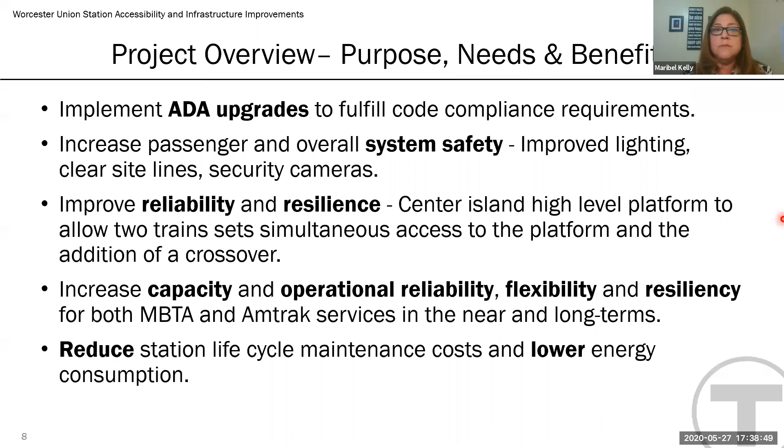So with the next slide, please. With that said, I'm going to give the post to Chris. He is our architect for Union Station, and he can give us detail of the project overview.

Thank you very much. Thank you, Maribel. With this first slide, this is a project area map, just to help identify the location of our project in relationship to the greater Worcester area. Our project is located adjacent to Union Station, which is item number 1 on the plan, with our platform, which is item 2, extending from Union Station towards the east to the existing MBTA parking lot, which is item number 3. Union Station, as many of you know, is located in downtown Worcester and within walking distance of some of the popular areas, such as area number 5 to the south, which is the Canal District, and the new Polar Park area number 6, also to the south and west of the station, as well as City Hall, which is area number 7, and the DCU Center, area number 9.

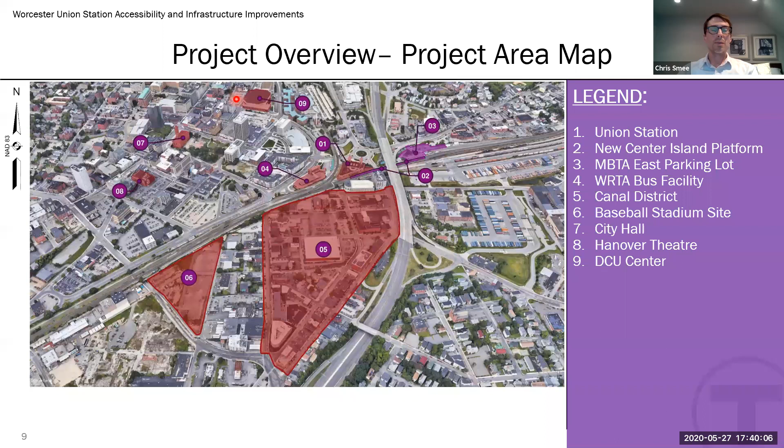Next slide, please. This is an existing conditions layout, really just to emphasize the fact that the existing platform is only a partial high-level platform, so the only accessible boarding area is directly behind Union Station. Then as the platform extends to the east under I-290, it transitions into a low-level platform, and all of that is adjacent to the existing station track. So it's only a side-mounted platform, a side platform, so it only allows for one train to enter the station at a time.

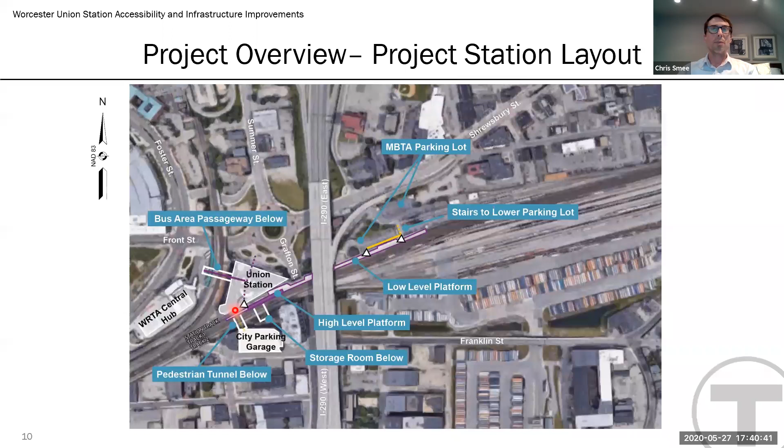Here we're going to talk about station access. The station platform is going to be a new center island platform, item number 8 on the map, which extends east to west under I-290, with access to the platform at the west side coming through the station building, and on the east side coming from the parking lot.

The station building does offer multimodal access, whether that's area number 1, the passenger drop-off area in front of the station building, or area 2 to the south, the existing parking garage, which provides access via an underground tunnel.

From Harding Street, area number 3 is where the taxi stand and designated Lyft and Uber pickup areas are. Area 4 is the existing WRTA, the Worcester Regional Transit Authority bus facility for local buses. Area 5 along Harding Street is for intercity bus connections.

On the west end, all of those intermodal transportation areas will come into the building at area number 6, the existing rotunda. Our project is going to make a new connection, item number 7, a new passenger platform access corridor. This is also where we're going to relocate ticketing to.

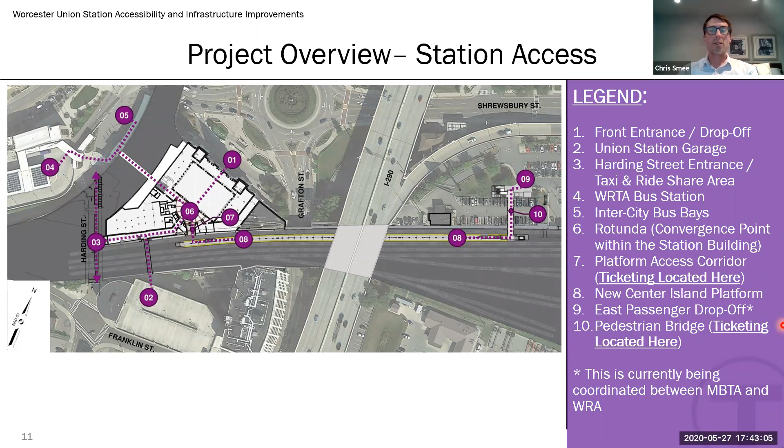This is an overall 3D view of the station. I really just want to emphasize here that this is a full-length, high-level platform located between the station track and track 1, so we'll have access to trains on both sides, allowing for two trains to enter.

This platform will have a full-length canopy, providing coverage for passengers along its full length. Access at the east and west sides we'll get to in a moment. Some existing features are identified in black, and the new proposed features are identified in purple.

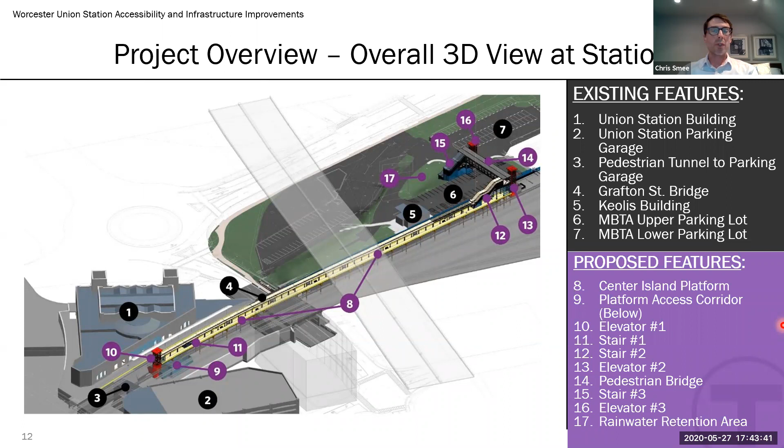This is a 3D view of the west end of the platform. Primary focuses here are the access from the new passenger platform access corridor, area number 3, shown in light blue, with access up to the platform via the stairs, item number 4, as well as the elevator, shown in red, item number 1.

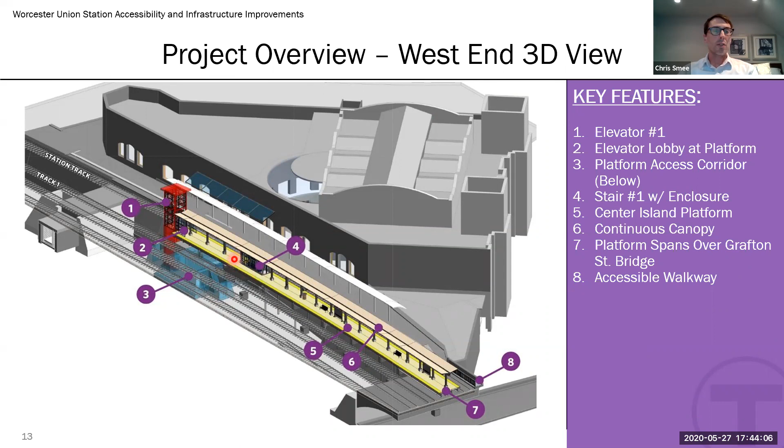This is a rendering of the proposed platform from the existing parking garage roof. One thing to note is that this rendering, as well as the rest of them, are not finished renderings. You can see we're showing the Union Station building just as a simple mass, solid gray, solid white. It's really just to give you an idea of the overall feel of the station. Finishes and things of that nature aren't what the final ones will be.

Most of those will typically be painted black steel, reminiscent of historic train stations, to help tie the new platform in with the historic station itself. Another thing to note is I-290, seen in the background crossing over the platform, which creates a visual separation between the east and west sides of the station for most views.

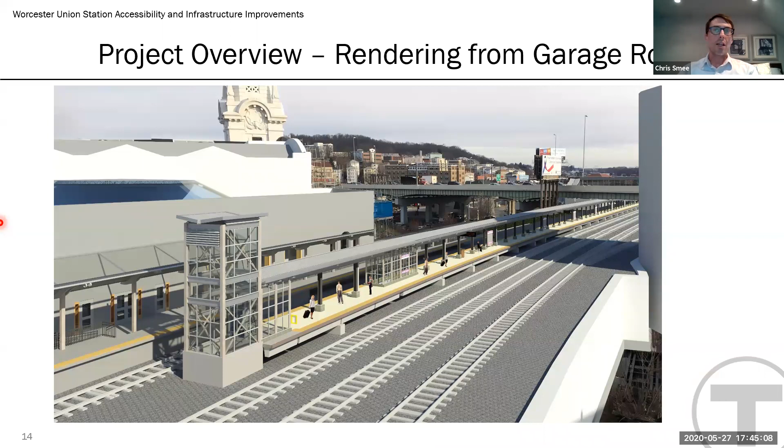This is a rendering from the platform, the west end of the platform looking west, with the new stairs going down directly in front of you, which will be protected via an enclosure, and the elevator in the background.

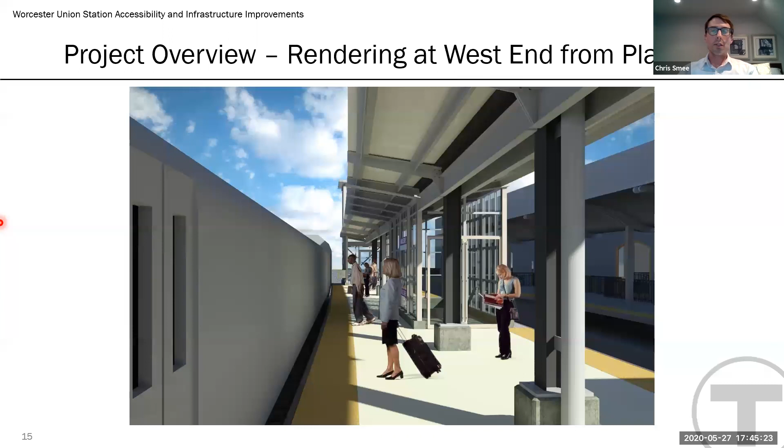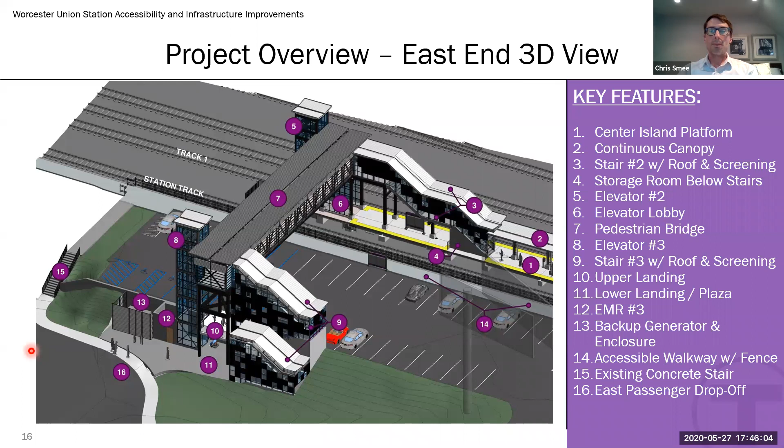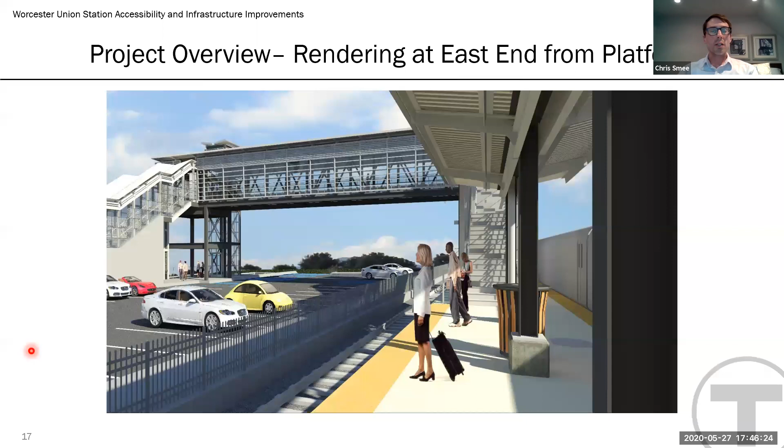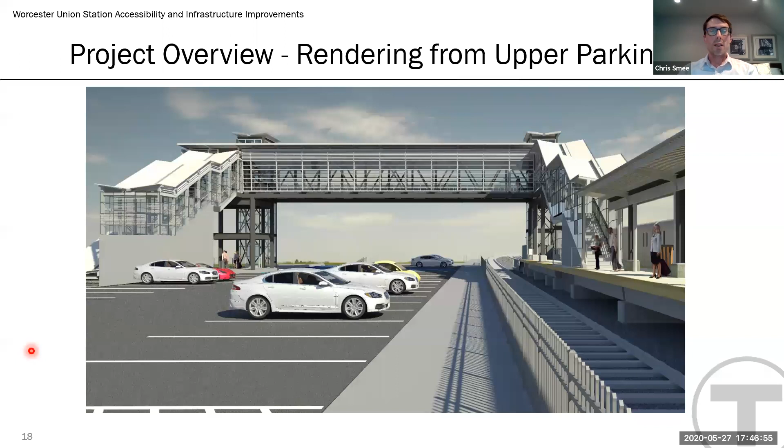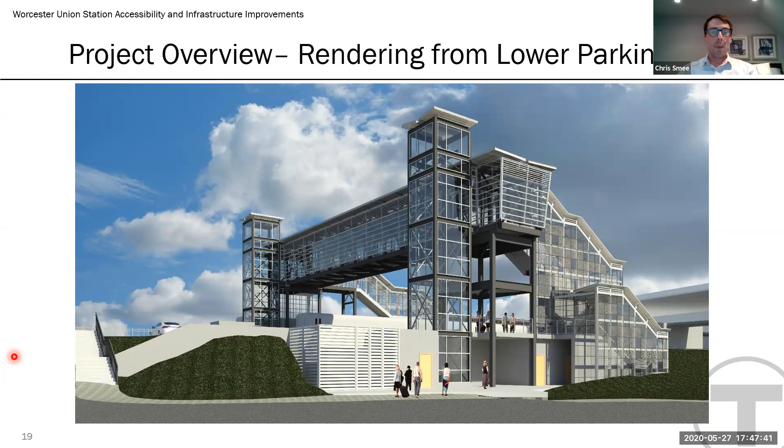Here is a rendering from the lower parking lot. This is basically the view you'll have as you first enter that east parking lot coming off of Shrewsbury Street, where we're trying to create an iconic structure at this end that will complement the Union Station building without taking away views. It's a little more modern, but the use of black painted steel, both for the elevator towers, the stair towers, and the bridge, will carry into the platform and create continuity from the east end to the west end, establishing an identity for the east end that works well with the Union Station building itself.

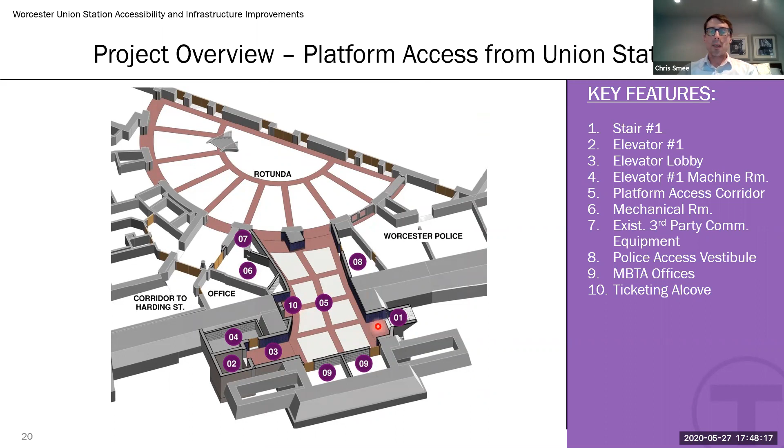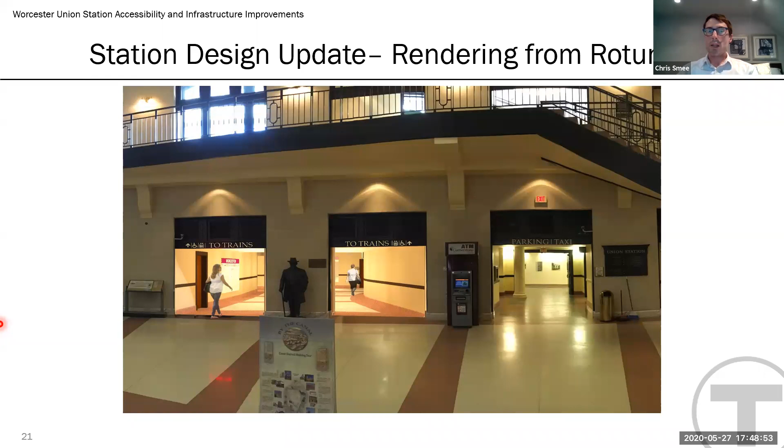At this point, I'll turn it over to Kevin to talk about environmental.

Thanks, Chris. Kevin Slattery, environmental specialist, working on this project. I have just one brief slide on environmental aspects—it's a very minimal impact project, so happy to report that to everyone. We've evaluated the project in light of federal and state regulations, and it qualifies for categorical exclusion through Federal Transit Administration National Environmental Policy Act regulations. Probably the key aspect of the project setting is the historic nature of the property, since historic Union Station is involved with the project.

We've evaluated and determined there's no adverse effect on historic resources. We have concurrence from the Worcester Historical Commission, and there's ongoing coordination to close that loop with the Massachusetts Historical Commission.

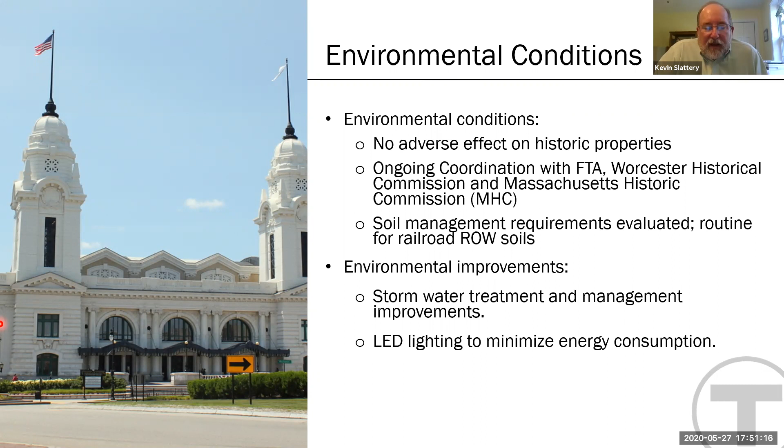With that, I think the next slide is project schedule, and Eric's going to talk with you about that. Thank you, Kevin. So I'll briefly go over the project schedule. I'm going to start with where we've been. The 30% submission was made in July of 2019.

The 75% submission followed shortly thereafter in November of 2019. The 100% submission was originally slated for June of 2020, but we accelerated that schedule to April of 2020, and that has been made so far in our efforts to advance the design as quickly as possible. That sets us up for the bid phase to begin in August of 2020 and wrap up in October. I must note that the bid phase wrapping up in October is pending the allocation of construction funding later this year. The notice to proceed is expected for the contractor in November, and then we have a 2-year construction period, with the project completed in the fall of 2022.

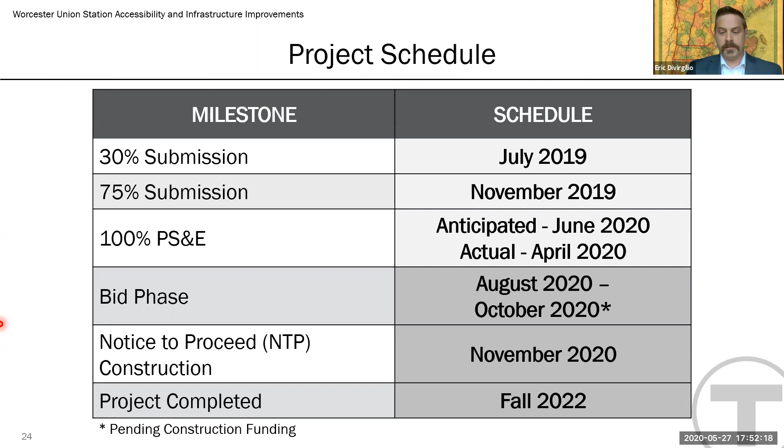With that, I'd like to turn it back over to Chris. Thanks, Eric. For construction phasing, we spent a lot of time working with the T to develop a plan that both allowed the contractor to perform their construction duties as quickly as possible, as well as maintaining operations and function of the station throughout the process, with minimal impacts to train service and to passengers.

Next slide, please. So we developed a 3-phase process. This is phase 1, approximate duration about 4 months. During this phase, there would be minimal impacts to passengers as they'll continue to board the train where they board it now, via either the high-level platform or the low-level platform. Most of the work during this phase will be for the contractor to install a new temporary platform, item number 1, at the east end of the station, a little bit east of the permanent platform. This will allow work in future phases to go unimpeded by train service, so train service can continue without impacting the contractor's ability to do work as he moves forward.

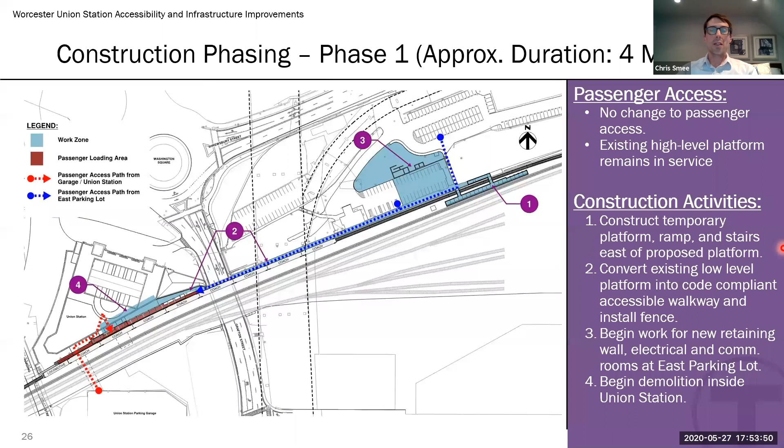Starting with this phase, the contractor will be taking up approximately 26 spaces from the upper parking lot to use as a laydown area. So throughout the duration of construction, there will be a slight reduction in the number of parking spaces available at the east end. Next slide, please.

During phase 2, this phase will have the biggest impact to passengers, as all passengers will board the train at that new temporary platform at the east end. Passengers who currently park in the east parking lot, their travel times will be about the same, if not less. But passengers who typically access the platform via the Union Station building will still do so, going up to the 2nd floor as if going onto the platform, but instead they'll continue along the low-level platform or accessible walkway all the way to the east end to access the new temporary platform during this phase.

During this phase, the contractor will be building the west end of the platform and completing all of the work inside the Union Station building, so that the west end of the platform can be used in the next phase. Next slide, please.

During phase 3, the west end of the platform will be open in its finished condition, with access through the Union Station building, going through the new access corridor, coming up via the new elevator and new stairs at the west end of the platform. At the east end of the platform, we will be providing a temporary egress ramp to maintain egress capacity in the event something happens during construction.

During this phase, the contractor will be completing all of the work at the east end of the platform: the new elevators, stairs coming up from the platform, the new pedestrian bridge, the new stairs and elevators that make the connections to the parking lot, as well as the rest of the parking lot paving improvements.

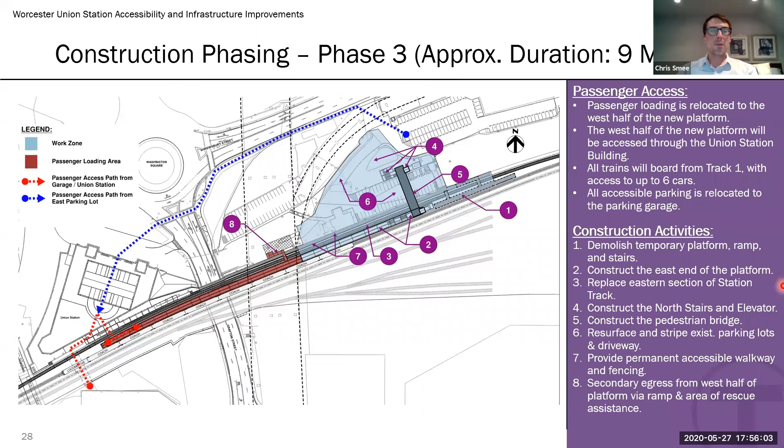This slide is talking about access between Union Station and Polar Park. Union Station is identified as Area B on the plan, and Polar Park is Area C. Some typical pathways between the two locations are identified with the red dotted line and blue dotted line, 1 and 2.

Typical walking times are approximately 10 minutes, and that'll remain for most of construction. During phase 2, when the temporary platform is in service, which is item A on the map, some slight additional walking time of 4 to 5 minutes will be needed, indicated with walking routes 1A and 2A. So total walking time will be approximately 15 minutes during this phase.

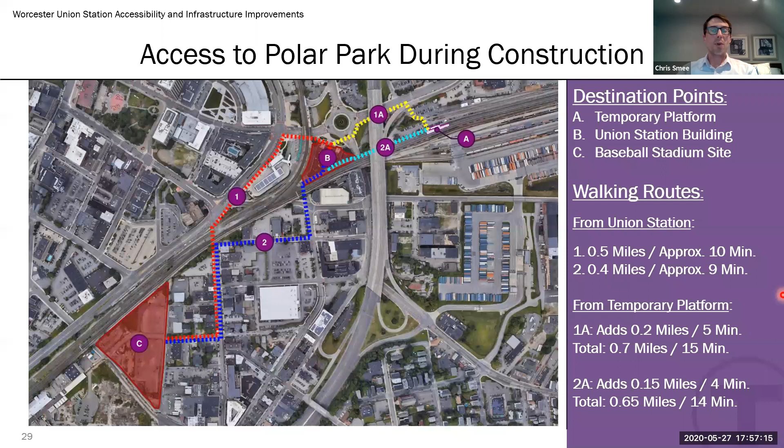We're still in discussions with the City of Worcester, WRA, and WRTA to see if they have plans to possibly have a shuttle service during this phase, to allow for passengers to be picked up in that east parking lot. Next slide, please.

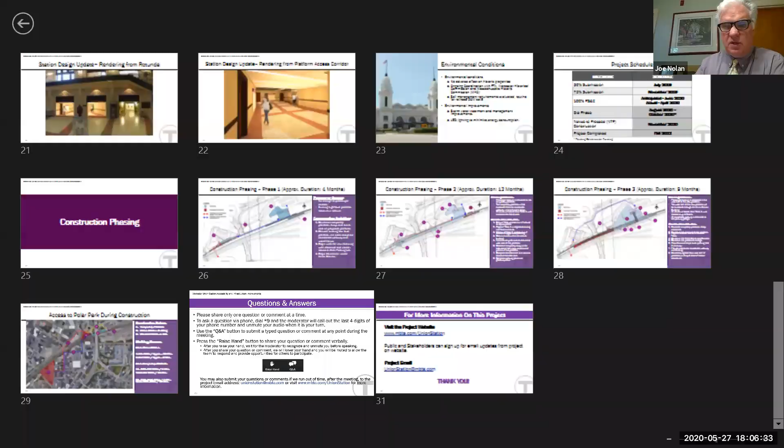And Eric, if you want to speak to this.

Sure, I'll go quickly. Even though we have 100% design, there's a long lead time between April 2020 and the bid phase in August because it's all about funding. We requested within our CIP process the funding for construction of Worcester Station, but we won't have final resolution on whether this project is funded until end of June. By the time we get the funding and grants to take the project out for construction bidding, it'll be August 2020.

From August, the bid phase is a long process, going to advertisement, then bidding. We'll probably open bids by November and get a notice to proceed for the construction contract. It's a 2 year construction schedule, which is very aggressive, so we're going to be challenging the construction contract to finish this project.

This project is really big, and the main thing we've kept in mind during these phases is to keep service - regular service schedules are not going to change, with the only exception of a few weekend outages which are necessary. I can't tell you the exact number of weekend outages because we have to have the construction contract on board, but it will be few, and we'll provide alternatives for those cases.

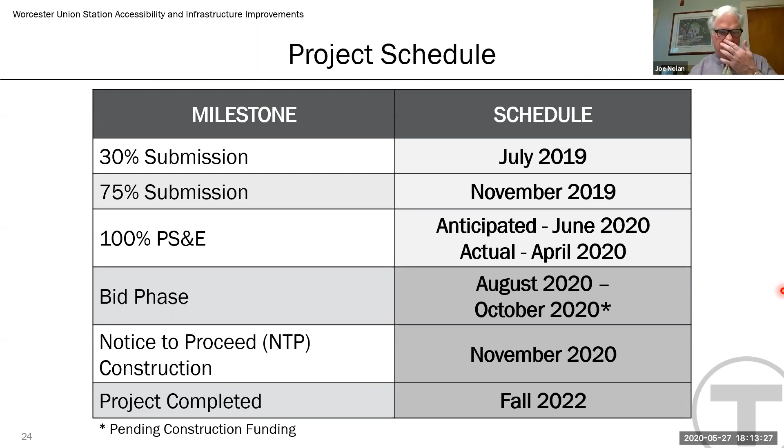Joe, we had another question in the Q&A, in the written Q&A. It says: what are the plans for wayfinding signs in the station for bus connections, city streets, and attractions?

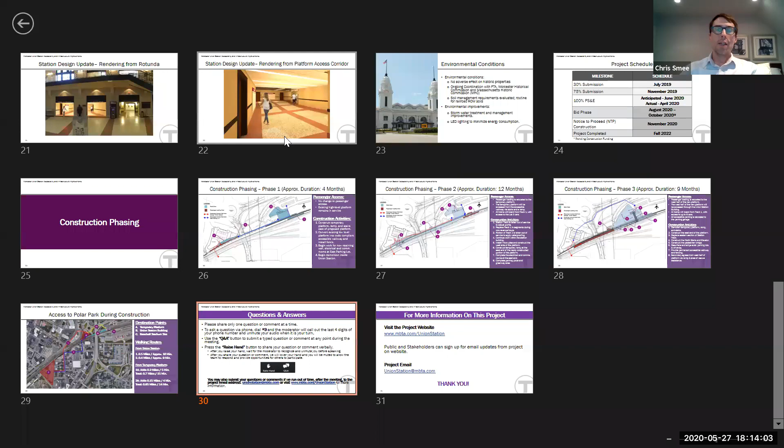I'll go ahead and answer that. We've been working closely with the MBTA's wayfinding team, as well as the WRA, to put some new wayfinding signage both in our new area and throughout the building. We're coordinating with the WRA to make sure the signage still meets the historic criteria and is well coordinated with the existing characteristics, but provides the latest styles and information to make it clear which way to go, whether for buses, the street, or Uber and Lyft — wherever you're going. So there will be new signage throughout the first floor of the Union Station building.

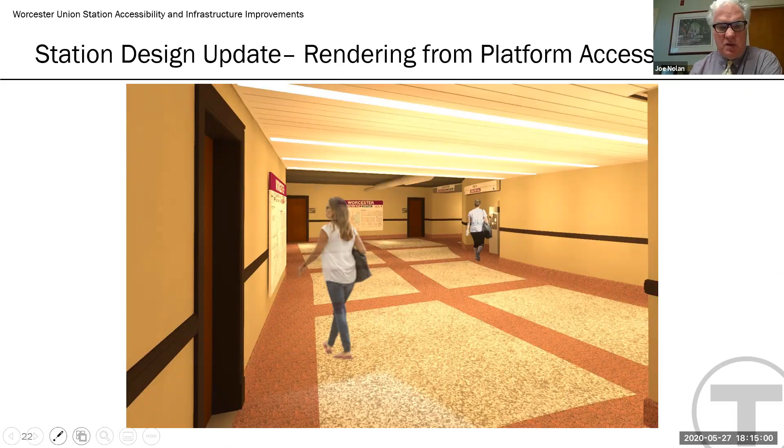Thank you everybody for participation. Let me go to the last slide and remind everyone — I think this went very well for a virtual meeting. I appreciate everybody's patience and participation. This is an exciting project. It's going to really be a benefit to Worcester and to the MBTA transit commuter rail system and the Worcester line. If you have any questions at all, you can go to...